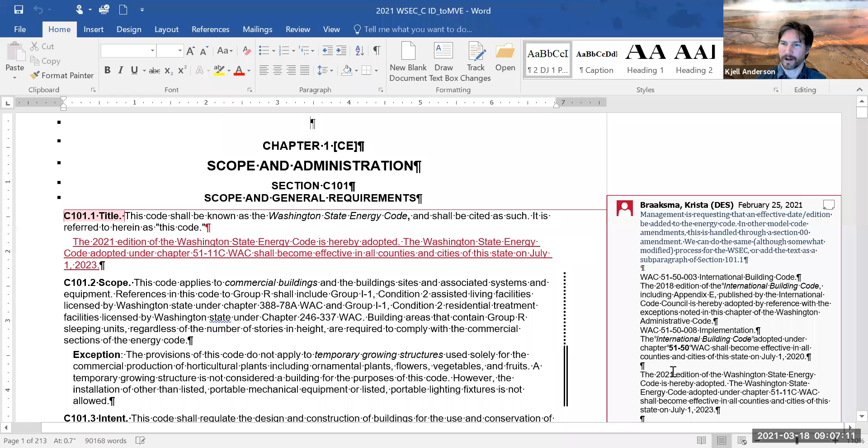As an introduction to what we're doing, we have the 2018 Washington State Energy Code, which just recently went into effect. And we are integrating it with the 2021 International Energy Conservation Code. And the reason we're doing this, we are not writing code language. We are simply taking the 2018 Washington State Energy Code commercial and overlaying the pieces of the 2021 International Energy Conservation Code that would move it forward in terms of energy performance or clarity of language.

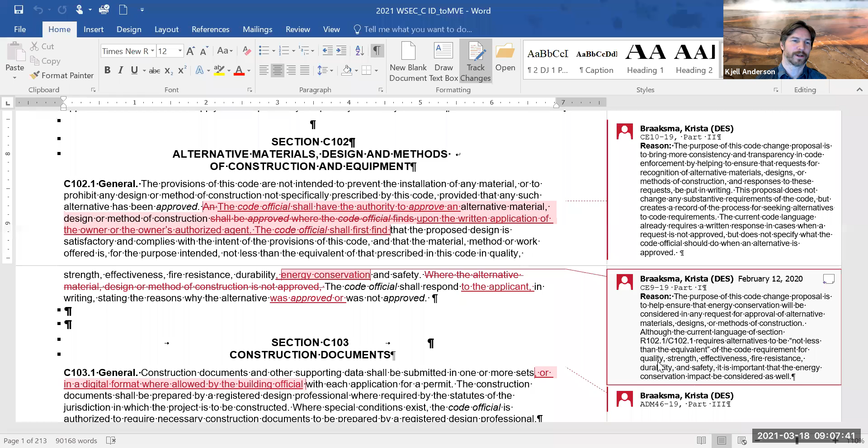We have the rule of not making it worse in terms of performance. So if there's like a value of a lighting power density of 0.5 and the IECC moves it to 0.4, we should probably take the 0.4 because that's the more stringent of the two. So that's the general rules we're playing by.

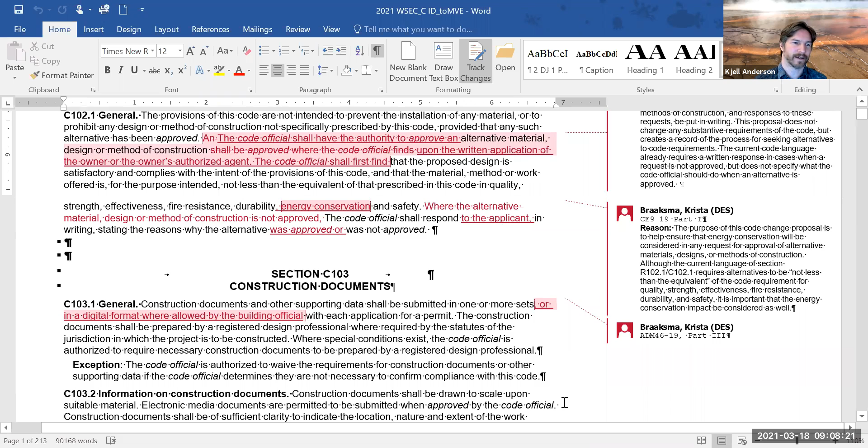And it's simply an exercise in doing that and then correlating the two so that what we release to the public in a month or two is relatively coordinated with itself and the best of the IECC and the Washington State Energy Code. Those are the goals. Are there any questions about the goals or comments on the goals?

So the integrated, okay, I'll just take that as a no.

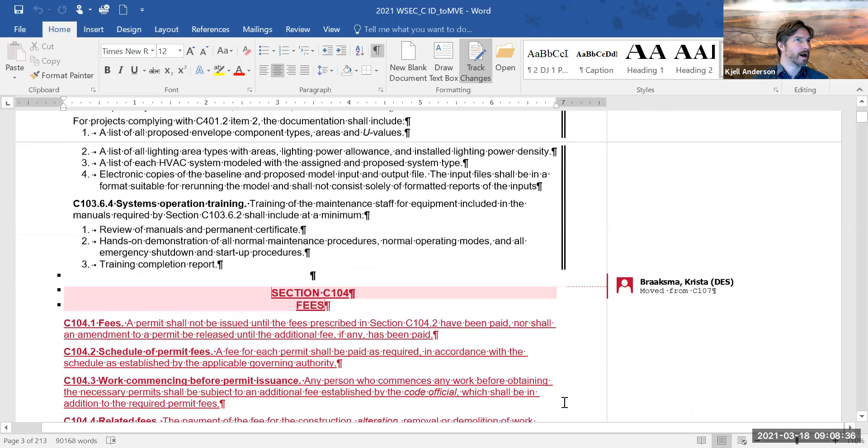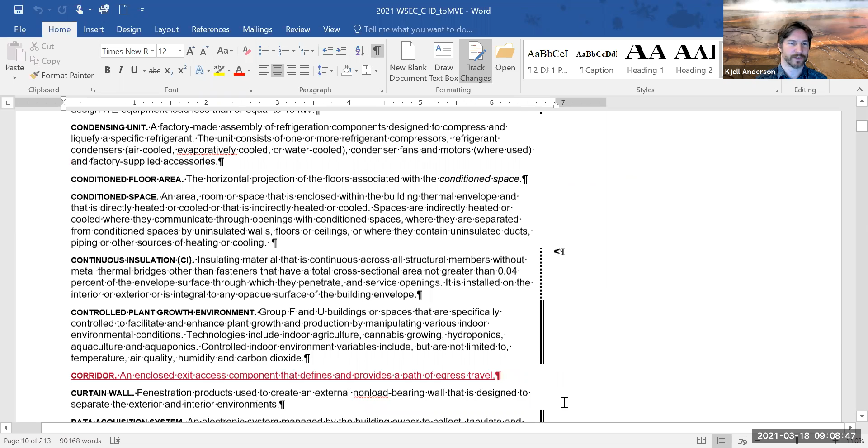It's about 213 pages long, the integrated draft. Krista has done an amazing job of threading the two things together and making them relatively seamless, and then highlighting areas where there's concern or where there's questions. There's a lot of discussion on how we have decent code language.

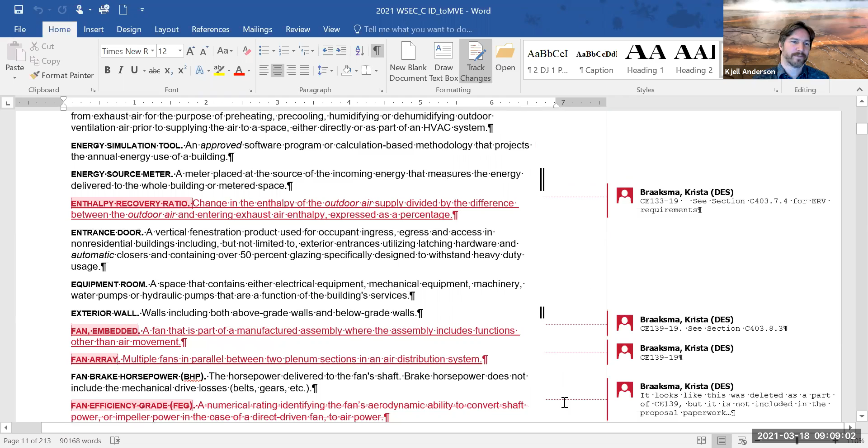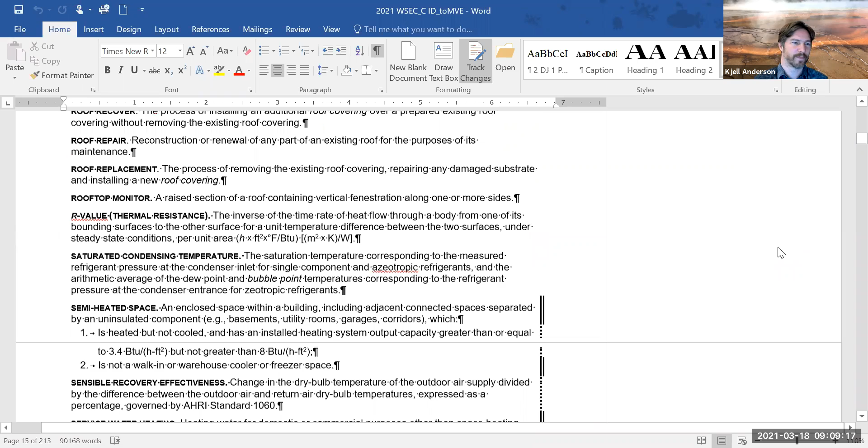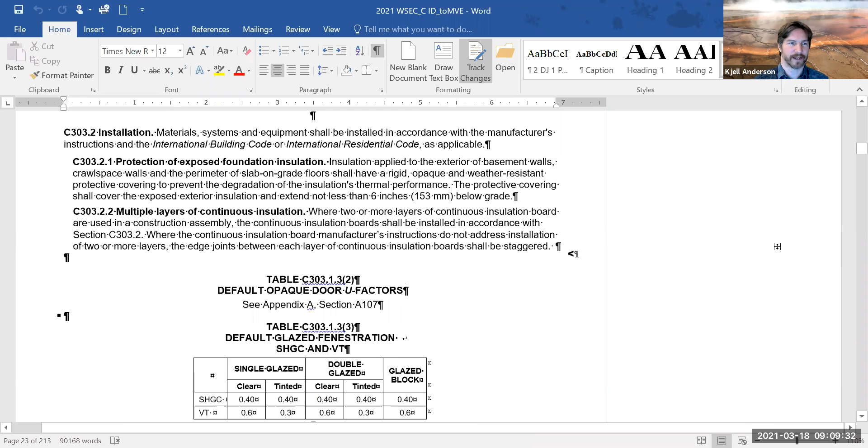So the overall process will be: this goes to the MVE committee in a month. If the MVE committee approves it or makes modifications, then it goes to the council the following day. Council will then suggest it goes out for a 60-day public comment period, where all code change proposals for the next code will be accepted. Those proposals have to have economic data and other data associated with them.

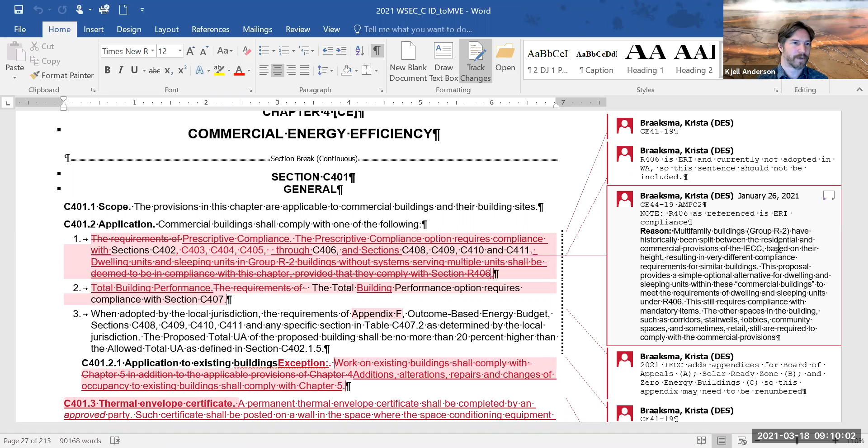We'll probably accept 100 or more proposals. So the integrated draft is what will go out to receive those proposals. We can't expect every section of the code to get a code change proposal, and we hope that actually doesn't happen. So we need to make sure the code is relatively consistent with itself, so that if nobody changes it, it's still acceptable as is. That's one of the reasons we're spending a great deal of time on this, so we don't end up with consistency problems in the code.

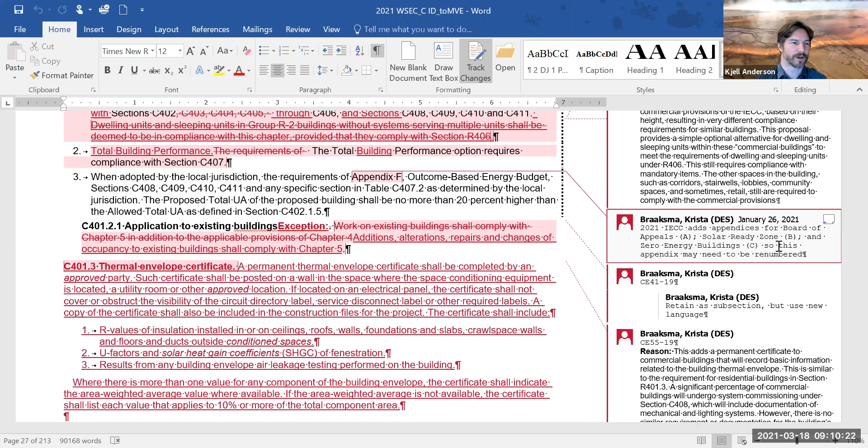We've gone through maybe 2/3 to 3/4 of the code, and we've given homework assignments in 8 or 12 areas where we knew we couldn't come to a conclusion. We didn't want to wordsmith something within the tag, because that can take hours and isn't the best use of the tag's time. We have about 18 or 19 people on the tag, so there's a lot of intelligence, knowledge, and experience being brought to bear on the code.

We have another meeting on the 26th of March, where we will consider, and hopefully this is the last tag meeting on this, from 8:30 to 1 o'clock. We'll go through the rest of the code and then go back through all the homework items where people are correlating something with something else.

I think overall it's going well. I think we're going to come up with something solid that provides a great basis, and I don't have any major concerns about that. I guess that's a brief report of where we are and where we're going. We can dive into any details if you want, or I can answer questions.

I'll open up to the committee and the public right now if there are questions or comments. Do you want more detail, or are you fine with what's been said already? Works for me.

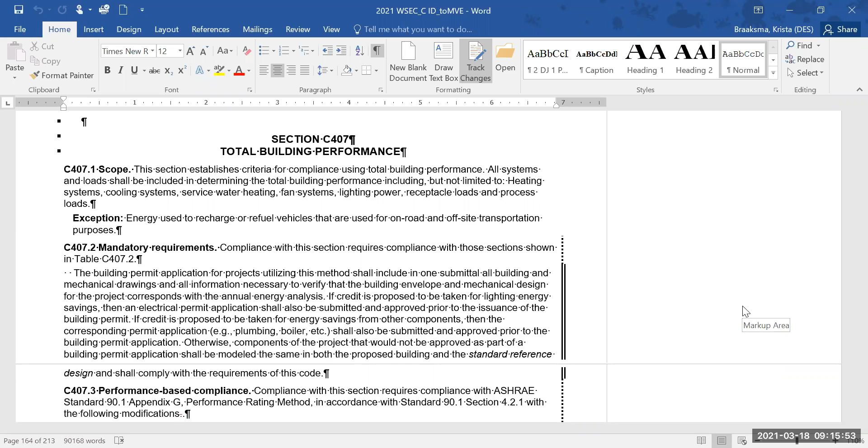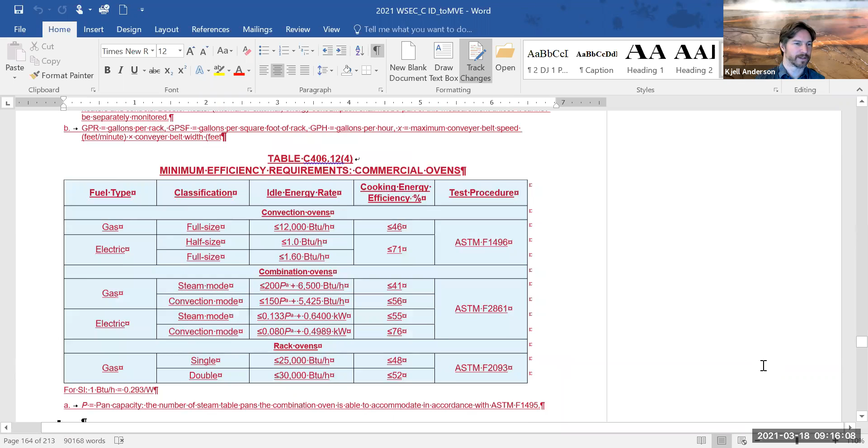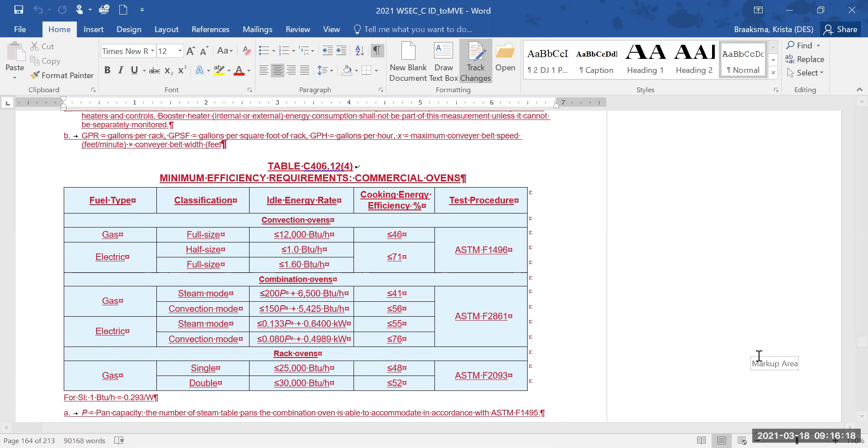Okay, are there comments, questions? Do you want to dive in a little bit more, or are we comfortable with where things are? There's no action, or committee action, on this. Is there a committee action that we should take, Krista? No, that was kind of me being overly optimistic that the tag would finish and we would have a finalized document. Yep, okay. I was equally optimistic.

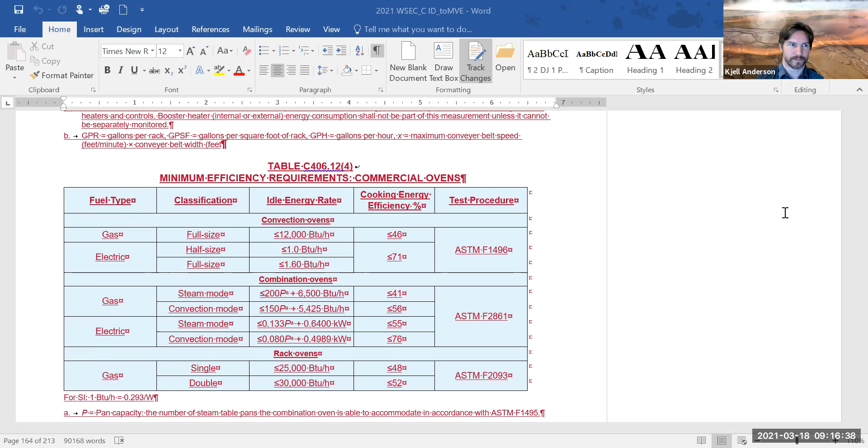Okay, well, I guess this segment of the agenda is done if there's no more questions or comments. I guess let's move on to item 5.

Public opinion on the C407.2 performance-based compliance. Krista's showing up there. So I guess, Krista, often we have somebody read this.

Sure. So this is on C407 total building performance. The question is section C407.2 of the 2018 Washington State Energy Code states that otherwise components of the project that would not be approved as part of a building permit application shall be modeled the same in both the proposed building and the standard reference design, and shall comply with the requirements of this code. Now that the standard reference design utilizes ASHRAE Appendix G and the building performance factors per table C407.3(2), should components not yet designed still be modeled the same? The proposed answer is no. The code specifies that the not yet designed proposed components shall comply with this code. This code refers to the Washington State Energy Code, not ASHRAE 90.1.

As context, I guess, Caroline, I'm going to put you on the spot. Could you translate this into English for us? Yeah, I can give it a shot. So in the 2015 Energy Code in C407, the standard reference design model SRD was attempting to be equivalent to a 2015 building, roughly. And your proposed design had to be 7, 10, or 13% better than that.

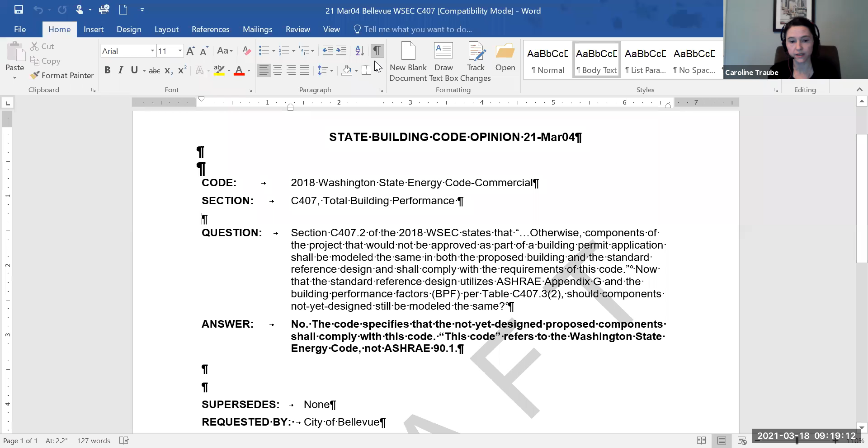And now the baseline is a 90.1 2016 Appendix G model. And that is roughly equivalent to a 90.1 2004 building. And the reason for that is from here forth for all future code cycles, that baseline building does not change. It is now a stable baseline that is a 2004 building. And the idea is every code cycle, we are going to make the threshold for how much better you need to be than that 2004 building increase a little bit. And so this overall is a much better method, because instead of every code cycle the baseline trying to get updated to match roughly a prescriptive building, it is now going to be constant.

And so back to then the question at hand, when something from a proposed permit set is not yet designed, it would not make sense to penalize the project and say you need to model that as if it was a 2004 component. And so what this interpretation is trying to say is that the elements not yet designed should be designed to what would be minimally required in the prescriptive sections of the 2018 Washington State Code.

And this is somewhat analogous to how it's dealt with in 90.1 2016 Appendix G, where if that was the code in effect in that appendix for proposed not yet designed elements, it refers you back to the prescriptive sections of 90.1 2016. It doesn't imply that you should model them the same as the baseline, a 2004 building.

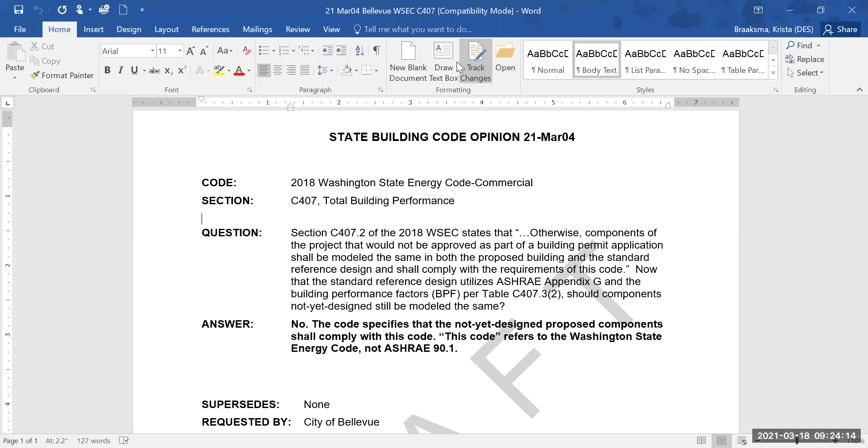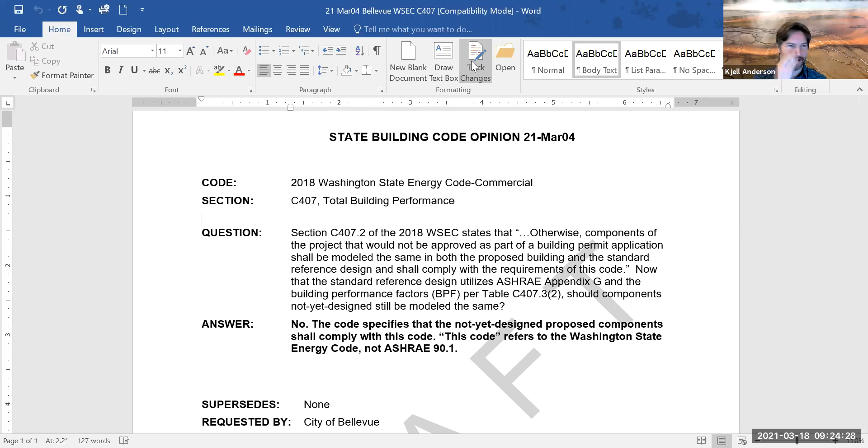This is Andrew, I'll second. Okay, we have a motion and a second. All in favor, say aye. Aye, aye. I heard four ayes, so all opposed say nay. Don't have anybody else that can say nay. All right, passes with flying colors. That brings us to other business.

And I think under other business, we were going to possibly opine on something that is not our jurisdiction. We can have opinions though. That's right.

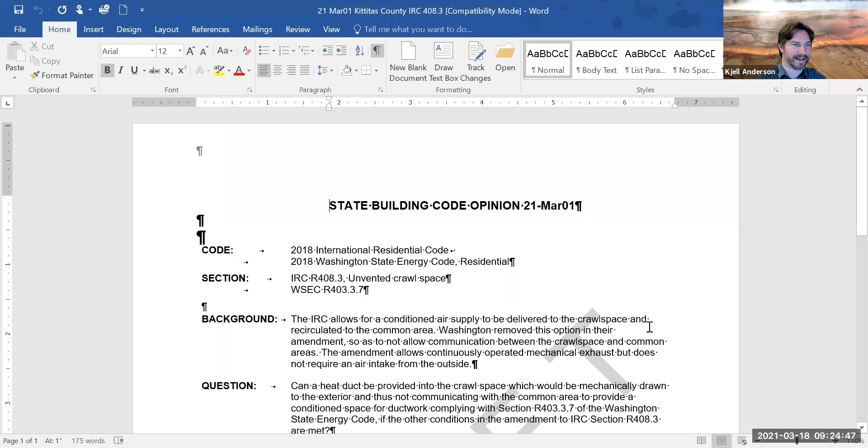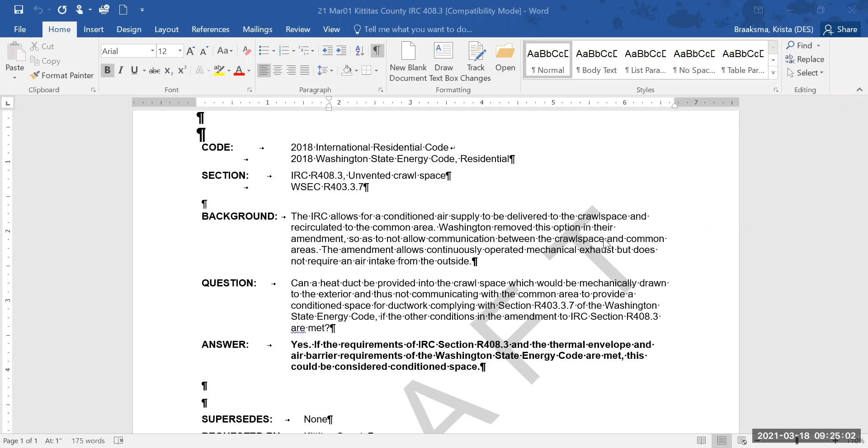So this is a request for opinion that came in looking at unvented crawl spaces, and if it would be allowable to heat the crawl space and have it meet the requirements of a conditioned space for ductwork. The background on this: the IRC allows for a conditioned air supply to be delivered to the crawl space and recirculated to the common area. Washington removed this option in their amendment so as to not allow communication between the crawl space and common areas. The amendment allows continuously operated mechanical exhaust, but does not require an air intake from the outside. Can a heat duct be provided into the crawl space, which would be mechanically drawn to the exterior and thus not communicating with the common area, to provide a conditioned space for ductwork complying with section R403.3.7 of the Washington State Energy Code, if the other conditions in the amendment to IRC section R408.3 are met? The proposed answer is yes.

If the requirements of IRC section R408.3 and the thermal envelope and air barrier requirements of the Washington State Energy Code are met, this could be considered conditioned space.

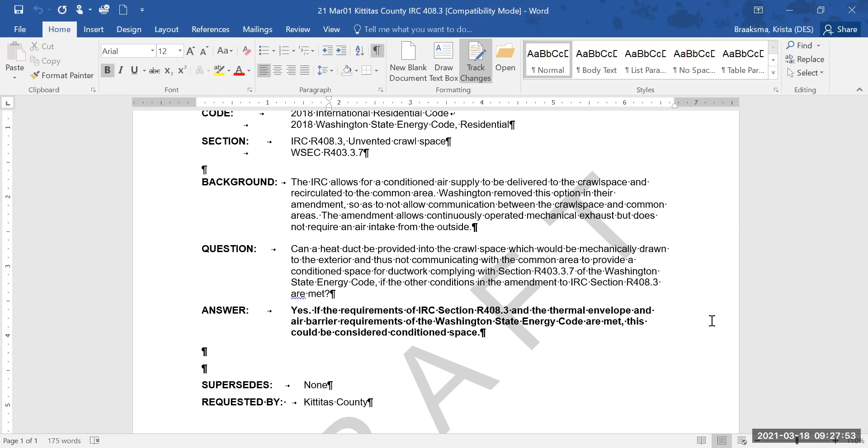This is actually a very common condition, particularly on the East Coast. We have higher humidity, so they do an encapsulated crawl space, then introduce heated and cooled air into this encapsulated and enclosed crawl space. The funky thing I see here is by introducing this warm air, you've got to mechanically draw it to the exterior. You're potentially doing something to the negative or positive air pressure in that crawl space, and it just doesn't quite compute. But as far as the code is concerned, I think the answer seems to be correct.

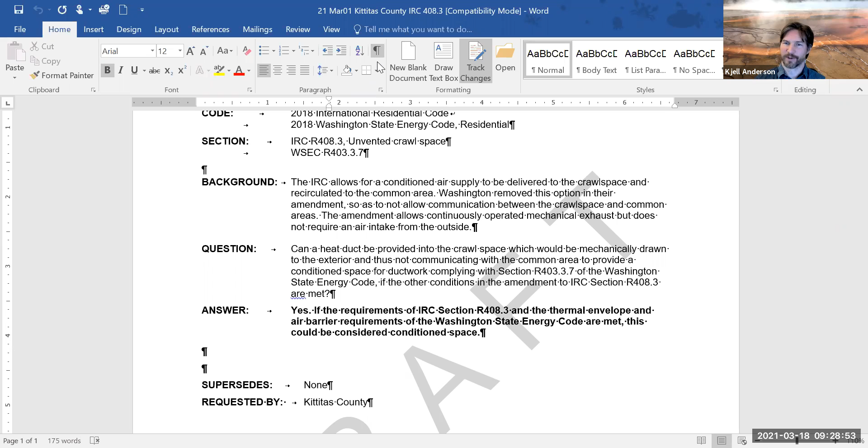Thanks, Doug. Yeah, I concur. If you essentially are making it into a basement, a very short basement that's not legally a basement, then you're putting a hole in the wall. So your air barrier is still going to be your subflooring above this crawl space, it would seem, and you've kind of got this.

Well, my understanding of that, Doug, is that this would mean if here's your floor and your crawl space is down here, you have a little house here. I'm embarrassed to be an architect drawing this, but you'd actually insulate this, and your air barrier would be down here as well. But if you're trying to get your ductwork to work, you've got no communication between your crawl space and your house.

You're right, your thermal break is on the exterior wall. You're going to add insulation to the stem wall of the crawl space, but you're not creating a coupled air connection between the crawl space and the house for this. So you're suggesting you would be able to have an air barrier up at this level? I think your air barrier would be there, your thermal barrier would be down below. Not necessarily, you wouldn't have thermal on the ground, but you'd have thermal on your stem walls.

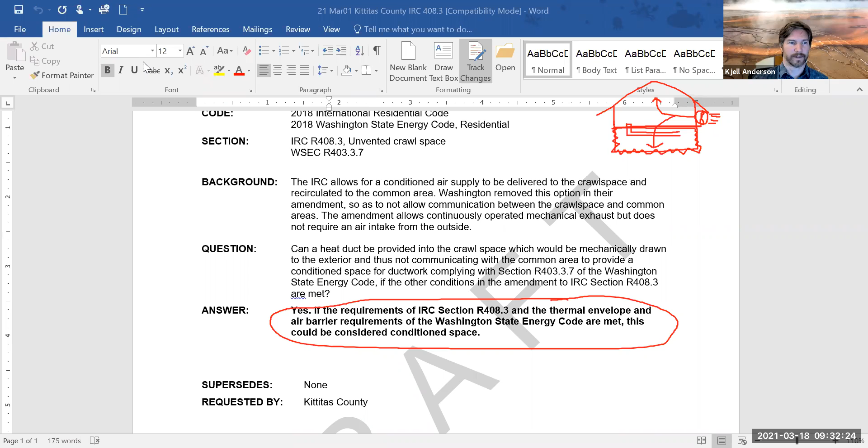But if it's only in an unconditioned airspace, you would need that flow, correct, Doug? Or would you need it even with a conditioned airspace? Well, our answer says if we meet the requirements of IRC 408.3, if the thermal envelope and air barrier are met. So IRC 408.3 requires a continuous exhaust vent, I believe. Okay, then we need to change that answer then, I think. I agree that we need to change the answer.

Here, let me read 408.3. Item 2 says continuously operated mechanical exhaust ventilation is provided at a rate equal to 1 cubic foot per minute. This is under the heading of an unvented crawl space. So you've got to provide a continuously operated mechanical exhaust ventilation in that crawl space to be unvented. And this is where Washington code deviated from the ICC, in that the underlying code couples the common space with the crawl space, and we don't - we took that out. So it sounds like by doing that, we basically disallowed the option of having what they're asking for in this question.

Well, that's kind of where - I like the idea of having that crawl space be a conditioned space for the purposes of capturing that energy code, but I'm not sure how to get it with how the underlying code is written.

So my understanding of radon is it gets into spaces from the ground, and if you had an air barrier that was intact, you would prevent the radon from getting into the crawl space in the first place because you had the air barrier below it. If you didn't have the air barrier protecting the crawl space, then you would get radon into the crawl space, which is why you would need to continuously exhaust it. I don't know enough about radon - does it not penetrate through a typical air barrier? I think there's a minimum thickness and standards for it, but yeah, basically. And maybe I don't know if it's the typical air barrier or you have to step up a notch, but I don't know the answer to that one.

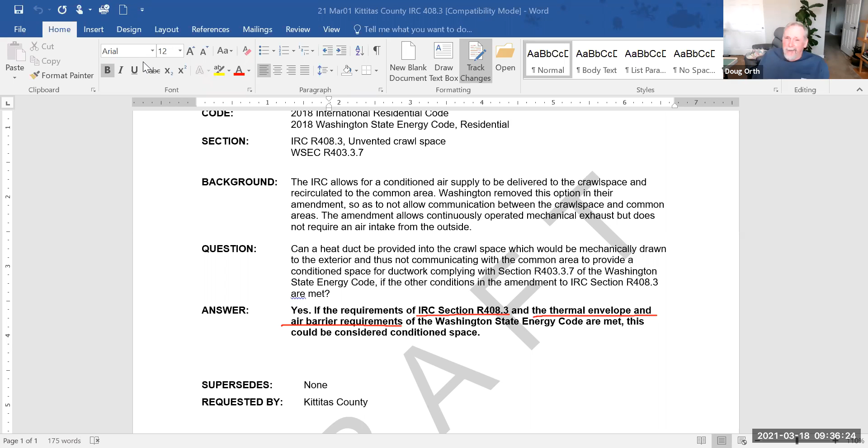I don't know, I'm just asking. I guess it goes back to the crawl space definition, and you might even need an alternative means in order to do it that way. But yeah, it gets complicated with ifs, ands, and buts.

And I know in other parts of the country, some people are using, rather than introducing heated, cooled air into that crawl space, they're putting dehumidifiers in there and calling it conditioned space.

I guess our charge today is, this is not our direct jurisdiction, but we could probably provide input. The goal of today, we would not submit an answer that would be the official opinion of the Building Code Council. We're providing input into the other committee that would eventually provide the opinion. So we're informing Andrew of what our opinion would be.

All right. Hey, I'm just chair, it's the members of the committee that make the decisions.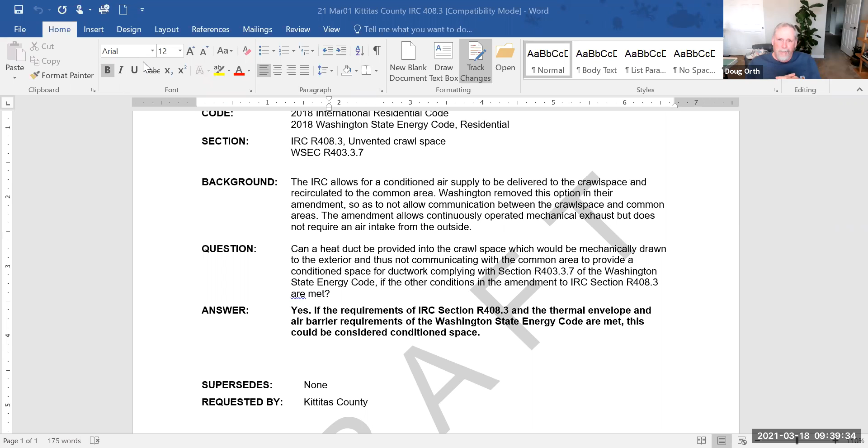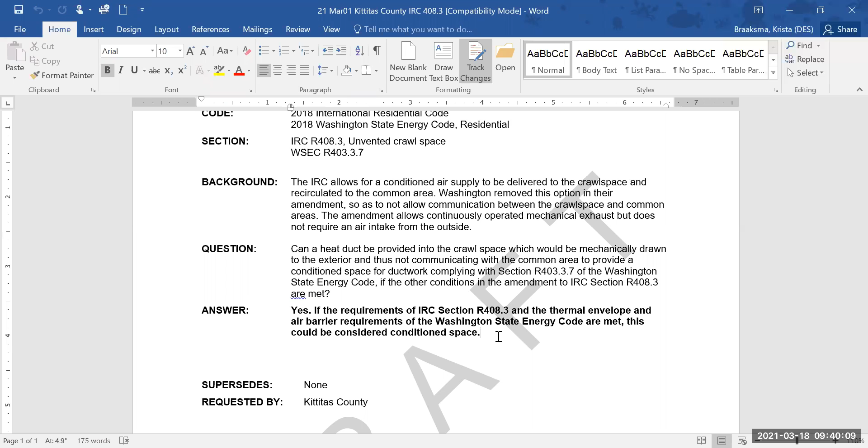Well, I guess we can provide, should we provide a written answer to Andrew that reflects our conversation today? Should we wordsmith an answer that then goes to Andrew? It's up to you, I think we've discussed it enough for consideration, but if you want to put something together, you're welcome to. I don't think it's necessary if you don't want to.

I'd rather at least formalize our discussion with a sentence or two for the record. You kind of stated it once already, Joe. Yeah, I think if we say something like...

Either the space is considered an unvented crawl space and outside the thermal envelope and air barrier, per section R408.3, and meets the requirements of section R408.3.

Or it is designed as part of the conditioned space, where ducts are within the space enclosed by air barrier and thermal requirements. Yeah, I think that's correct.

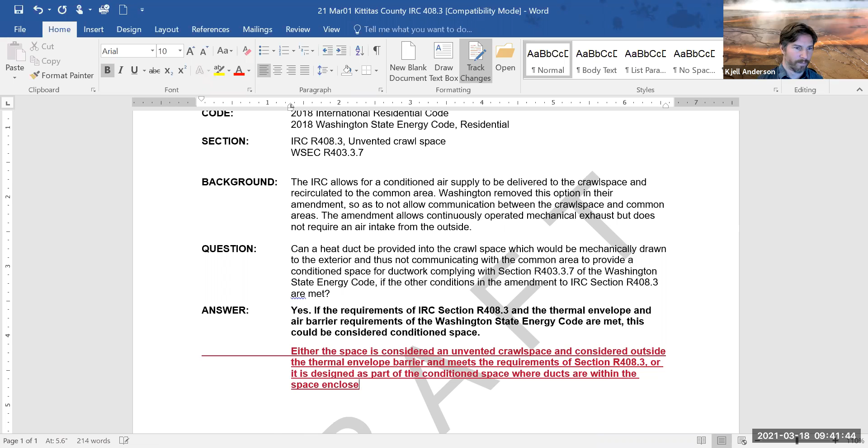And does not require section R408.3 to be met, or continuous exhaust. Yeah, 403, it'd be 408.3.2, that's the specific one. 408.3.1 talks about the quality and installation of the vapor barrier itself.

408.3.2, did you say? Yeah. That's the one that deals specifically with the mechanical exhaust ventilation. 408.3.1 talks about meeting radon requirements of Appendix F. So that would still apply.

Well, this is item 2 then, right? I'm not sure what item 2 means. Because I thought 408.3 had a list, or is it actually? There are under 408.3 two sub-paragraphs, 1 and 2. And 2 is the one that deals with the mechanical exhaust. Yeah, item 2. Yeah, that works.

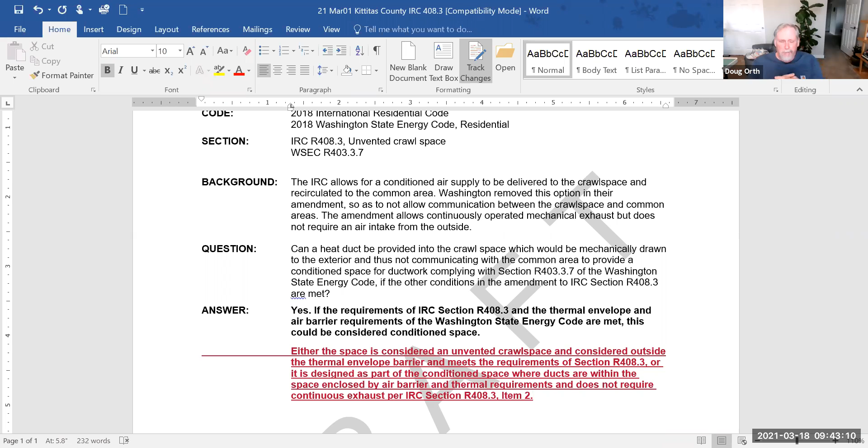I guess this is our opinion based on the energy code, not based on the building code and detailed understanding of radon. Yeah.

Okay, do we need any further discussion on this statement as written? It is not an official answer. It is simply something to codify or to collect the information from our discussion.

Any further comments, questions? I guess, just on the second part of that sentence, what we're really saying is if you've made the crawl space part of the conditioned space and it's in the air barrier and thermal requirements, it needs to comply with option 1, which is you put this continuous vapor retarder and you comply with the radon requirements, right? Because I think what we're trying to avoid is you heat that space and then you mechanically exhaust it.

Yeah, but because it's a crawl space, it's like this short non-basement thing, and so you still have radon concerns. So if we don't want you to comply with option 2, we do want you to comply with option 1. Yep. Okay. Yeah, makes sense.

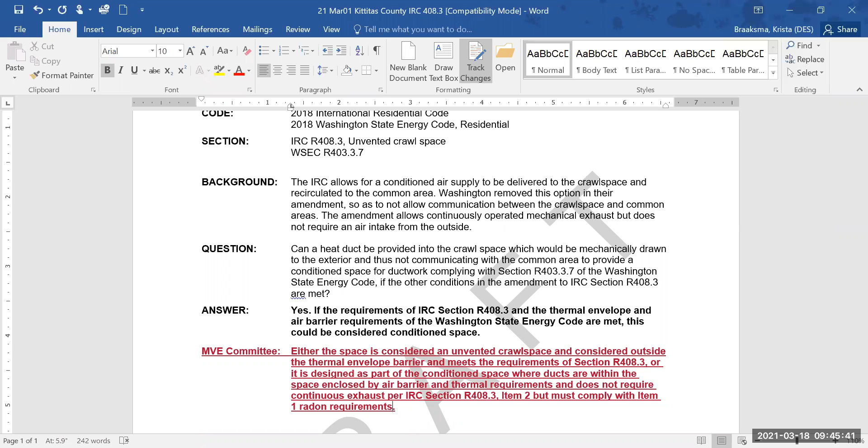So, Andrew, you have what you need? Yep, I've got what I need. Thank you. Great. Okay, well, I think we're done with this item. Is there any other business?

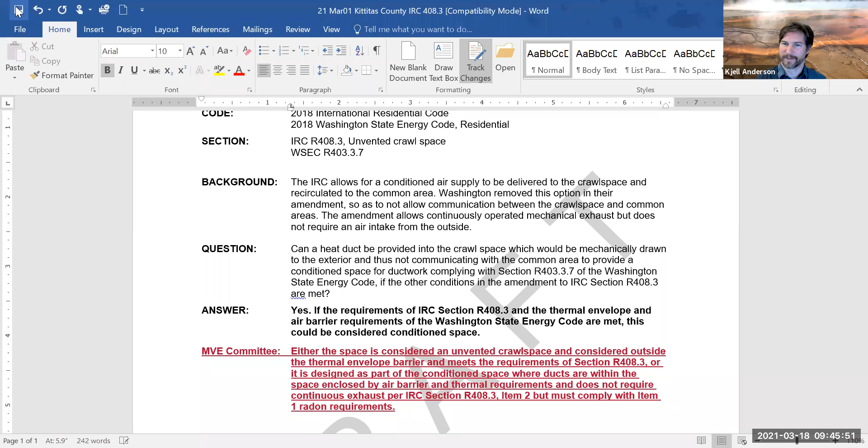Well, then, Bill? Yeah, go ahead. I raised this question on the legislative committee last week. It's my understanding tomorrow, or Friday, is that tomorrow? Tomorrow, in the council meeting, we potentially will discuss the ICC change to moving the energy code to a standard. Is there any discussion to be had here, or can that be saved for tomorrow? Or am I incorrect in that?

It is on the agenda for tomorrow, but we can discuss it here if the committee desires. I have no question, so I was just curious. Yeah. Yeah, I think...

I have an opinion on it that I'm happy to discuss. I think it was unfortunate that it happened, and it was a strategic move by several organizations. There's plenty of articles about the reason for it, but it appears that some of the organizations that typically fight against increasing the stringency of the code exercised some channels to change it from the process that has allowed lots of code officials across the country to vote on it, to move it forward, which is the majority of code officials across the country, to move it forward in terms of energy performance, to a different method which will allow fewer code officials across the country to have input into it.